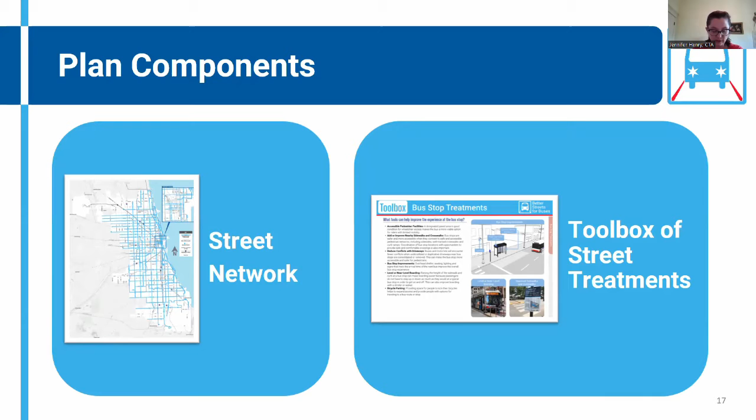However, feedback gathered through the outreach process will help inform those decisions as we refine the toolbox and the network and help guide future bus priority improvements citywide. A proposed network and a proposed toolbox have been developed and are now being presented for public comment. Next, we'll tell you more about each of them, starting with the toolbox.

The proposed toolbox of street treatments includes 21 tools in 3 categories: bus stop treatments, bus-friendly streets, and bus-friendly intersections. Each tool can help with one or more of the following: improve the experience of accessing or waiting for the bus, help streamline bus movement to reduce bus travel times, and make trips more reliable and comfortable.

Most of these tools have some trade-offs involved. For example, they may require repurposing of space, reconfiguration of streets or intersections, or making adjustments to signal phases. More information about these considerations is available on the website in the Toolbox of Street Treatments document or the Toolbox chapter of the draft plan.

In the interest of time, we are not going to go into detail about all 21 tools here, but we want to give you a sample, and at the end of the presentation, we can talk more about any tools you may want to know more about.

The first category is bus stop treatments. These tools apply to the bus stop, waiting areas, and nearby sidewalks and crossings that are used to access the bus stops. Two examples include level or near level boarding, which involves building a raised curb at bus stops so that passengers do not have to step up or down as much as they would at a typical bus stop. This can make getting on and off the bus easier and faster, especially for those with mobility impairments or strollers.

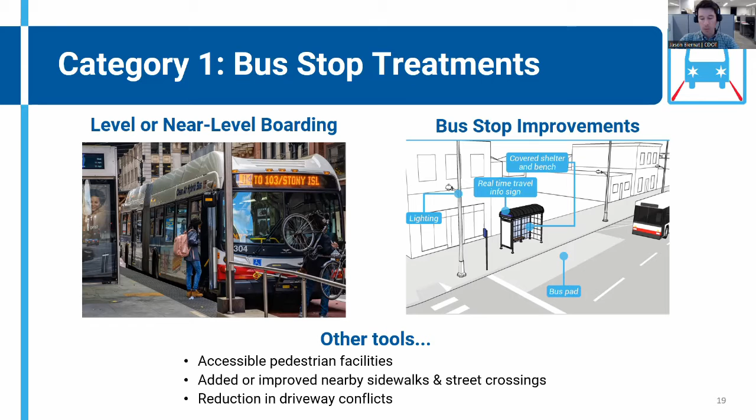Another example is bus stop improvements, which can include adding shelter, seating, lighting, or signs that show the arrival of the next bus in order to make waiting for the bus more pleasant.

The second category of tools is bus-friendly streets. These mainly impact bus operations by keeping buses out of traffic to reduce delays or conflicts with other modes at stops. The most well-known bus priority tool in this category is a bus lane, which is a travel lane dedicated for bus-only use so that buses can keep moving even when general traffic is congested. There are several different configurations of bus lanes, including curbside, median, and offset.

The one pictured on the left is a curbside bus lane. Bus lanes can be short or long lengths of a street and can be reserved for buses at all times of day or just during specified times, such as rush hour. They can also be shared with right turn lanes near intersections.

The other example shown on this slide is a bus boarding island. This is a tool that can be used in conjunction with bike lanes. It is a concrete island where bus riders can wait, board, and get off the bus that separates the bike lane from the general traffic lane, so that buses accessing a bus stop do not have to cross over the bike lane. This helps organize the space and improve safety and comfort for all users.

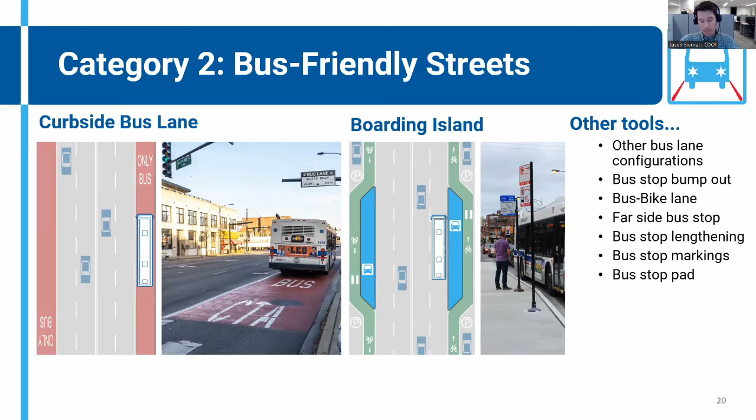The third and final category of tools is bus-friendly intersections. These tools relate to the signals and signs that control vehicle, bike, and pedestrian movements through intersections.

The queue jump signal, shown on the left, is a special bus-only signal that gives buses an early go light to allow buses to jump ahead of waiting traffic at an intersection. Transit signal priority, illustrated on the right, is a signal system that allows an approaching bus to send a request to the traffic signal to modify light timing, typically by extending the green light for a few seconds. This can be programmed in a number of ways and is often set up to be triggered only when buses are behind schedule.

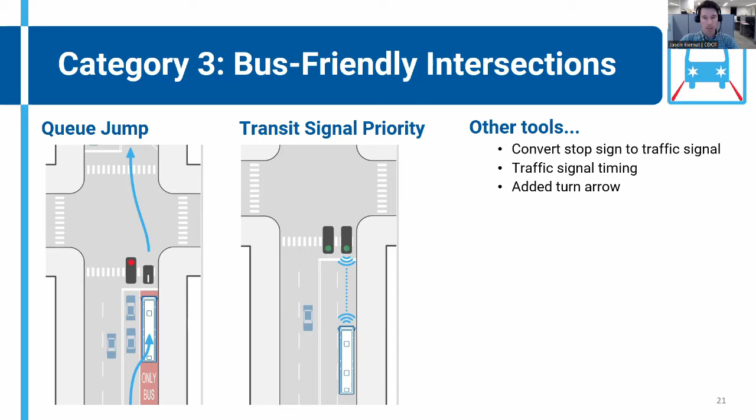You can see examples of many of these tools in Chicago as well as in other cities. Jeffery Jump is a bus priority project implemented in 2012 on Jeffery Boulevard, with the most significant changes between 67th and 83rd Streets. These included peak hour curbside bus lanes, traffic signal priority, and enhanced bus stop areas.

A second major bus priority project was implemented downtown a few years later and is used by the Jeffery Jump and 6 other bus routes.

Loop Link runs along portions of Washington, Madison, Clinton, and Canal Streets and utilizes red bus lanes that are in effect all day. On Washington and Madison, there are a number of queue jump signals and stops are served by long raised bus platforms with additional seating, bus tracker signs, and snow melt systems. On Washington, these platforms are also essentially extra long versions of bus boarding islands with a bike lane running behind them.

Bus priority zones are smaller projects, several of which were implemented in 2019, mainly along Chicago Avenue and 79th Street. The goal of bus priority zones is to target pinch points along major routes and implement key bus priority treatments in order to speed up these bus slow zones that are typically caused by congestion, insufficient space for boardings, or intersection bottlenecks.

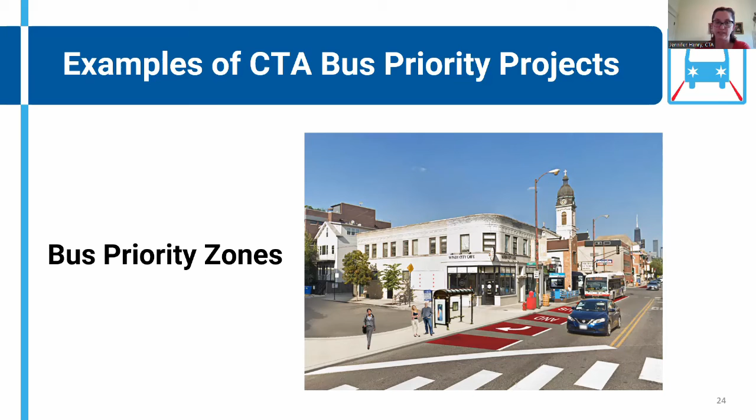Now that we've reviewed the types, excuse me, if that was feedback you all heard, excuse me.

Now that we've reviewed the types of tools in the proposed toolbox of street treatments, we'd like to know which, if any, you'd like to see more of in your neighborhood. Please select your top 1 or 2 choices from the following answers.

Number 1, changes to sidewalks and crossings to make bus stops easier and safer to access. Number 2, changes to street configurations that give the bus its own lane. Number 3, changes to the signals that give buses an advantage. Number 4, changes to bus stops to make them more comfortable. Number 5, no changes. And number 6 is other. Again, if you picked other, drop more details for us in the chat.

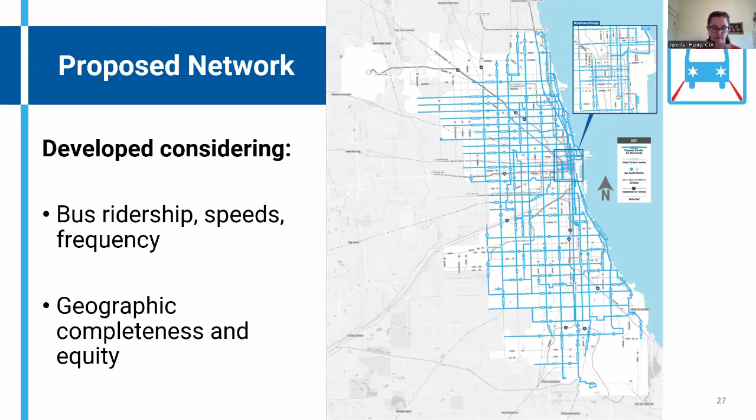The proposed network includes 45 neighborhood corridors, as well as 16 downtown corridors that are not listed here.

The proposed network is available to review in a number of formats. The map shown in the previous slide is available as a downloadable and printable map. The network can also be viewed as an interactive and zoomable map on the project website. It can be viewed as a summary list of corridors, as in this slide. And finally, it is also available as a detailed list of street segments, since some bus corridors include more than one street.

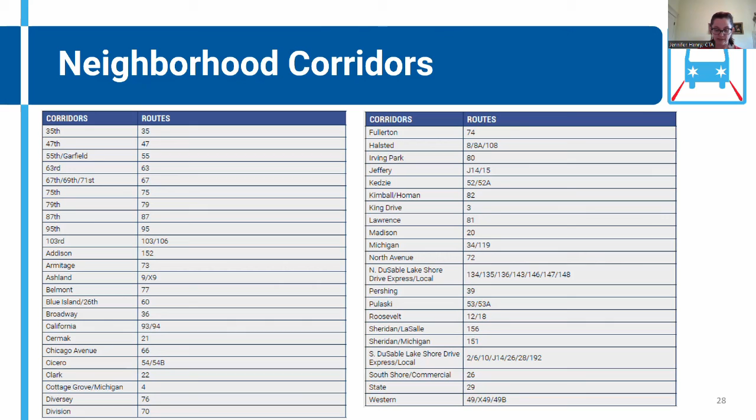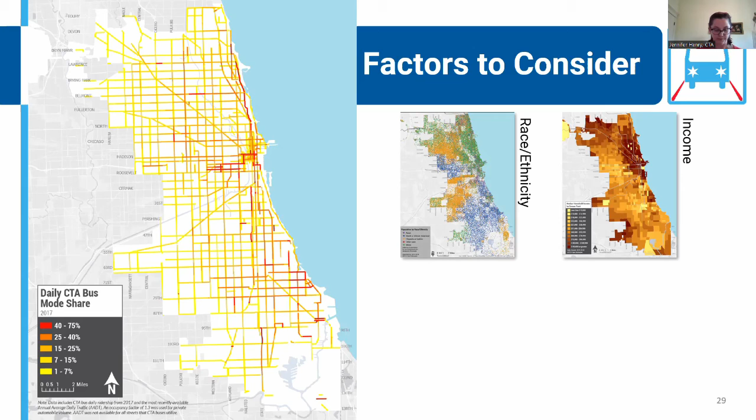But there are certainly other factors to consider: demographic and socioeconomic factors, bus stop conditions, bus speeds, etc. You can take a closer look at the data we have mapped in the Learn More section of the project website, as well as in the draft plan document. But you may have other ideas on criteria and data we should look at as well.

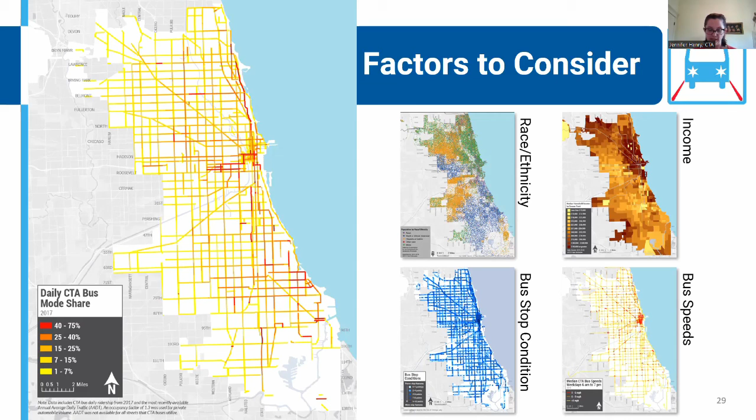So now we'd like to do our final poll to hear what you think about what factors should be used to help pick the network for Better Streets for Buses. Please select your top 1 or 2 choices from the following answers.

1, bus routes with the most riders. 2, bus routes with slow or unreliable bus travel times. Number 3, streets with bus stops that need improvements. Number 4, neighborhoods that need investment. Number 5, streets that need pedestrian improvements. Number 6, streets with high bus mode share, percent of people in vehicles that are on buses. Number 7 is other. Remember, if you picked other, drop more details in the chat.